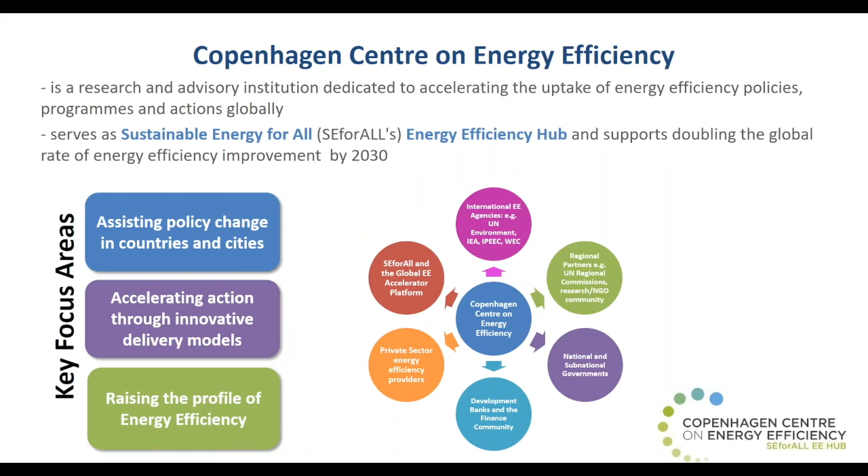Now, I would like to briefly introduce you to the speakers of today's training session. Frederick is a technical and policy lighting expert, graduating in electrical and electronic engineering with more than 35 years experience in the lighting industry. As international lighting specialist for United for Efficiency, Mr. Bass supports the development of technical tools and resources such as the Lighting Model Regulation Guidelines.

On the other hand, Bruno Lafitte is a lighting energy efficiency expert with more than 15 years of professional experience within the sector. He holds a PhD in physics and a master's degree in electrical engineering. As international lighting specialist for United for Efficiency, Mr. Lafitte provides support in the development and implementation of energy efficiency policies and labeling programs for on and off grid lighting in country and regional projects.

Our other panelist, Clara Camarasa, is a researcher and project manager with more than 5 years of experience in the field of energy efficiency in the building sector. At UNEP DTU, she is working as a postdoctoral researcher, and in the last 5 years of her career, she has focused on generating building data, along with other analytical frameworks needed to describe and accelerate the diffusion of energy efficiency technologies.

Our last panelist of today's training session is Raju. He's a senior expert on energy efficiency. And at UNEP DTU Partnership, he focuses on the analysis of policy issues, conducts qualitative and quantitative studies, providing technical advice and other direct support associated with energy efficiency in countries and cities.

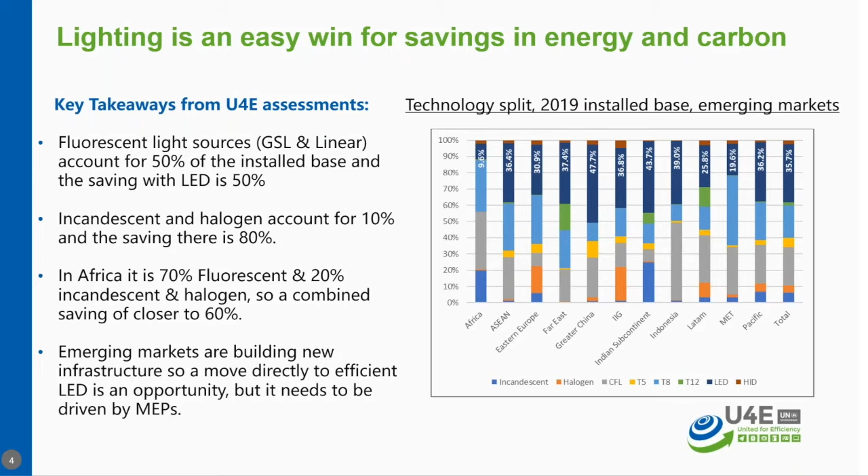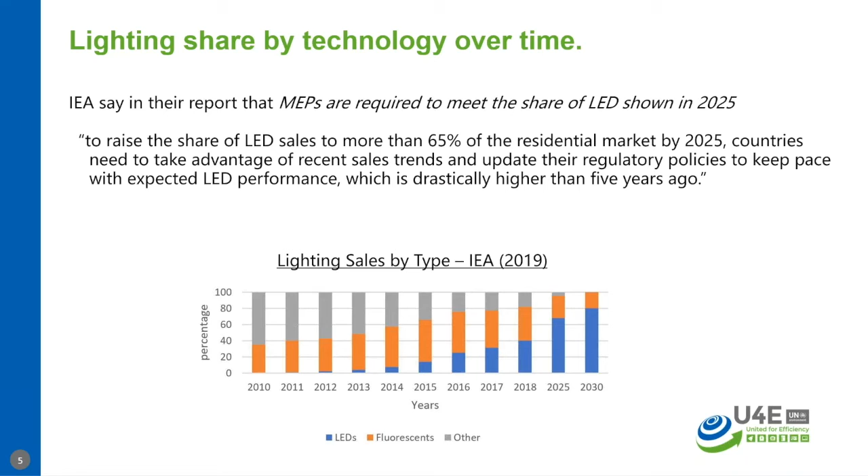Just a word about the model regulation guidelines. As I said, it's a policy framework, and we're looking across several different technologies. I'm talking about lighting today, but we're also working on refrigerators, air conditioning, motors, and transformers, all of them consuming electrical energy, all of which can be made more efficient by setting minimum energy performance standards.

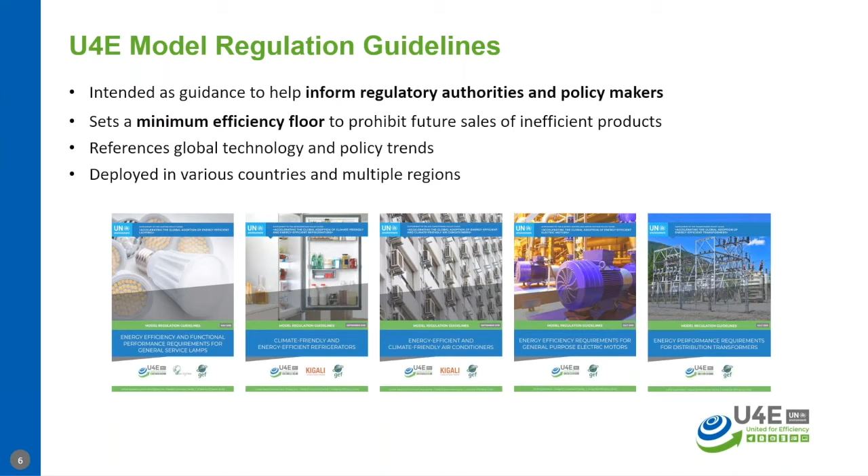When we produce model regulation guidelines, and they are intended as guidelines for national authorities to work with, we also produce supporting documentation. And for the lighting model regulations that I'm currently working on, we have in parallel written a document which will be published together with the regulations to support and explain the opportunity and how to introduce those regulations and adopt them into national authorities' rules.

Just a few words about what we're working on right now. 2 years ago, we wrote a model regulation for general service lighting. And just in 2 years, the efficiency and affordability of the LED alternative has improved much further. So we're revising them now because it's already looking out of date. We now know that LED is affordable and can replace compact fluorescent, which is 25% of the installed base. So we no longer need to offer compact fluorescent as a low energy option. I worked for a decade offering compact fluorescent as a low energy option, which it was 5 years ago, but it no longer is a low energy option.

LED is much more efficient. So there's an opportunity to simplify the whole regulation as a result. So we're revising that GSL, and it's in its final stages now.

I'm also working on linear guidelines. That means linear fluorescent lighting. We've simplified that, again, in parallel with the GSL, and significant savings can be realized if they're introduced without delay. Fluorescent is a huge proportion of the installed base of lighting, and half of that energy can be saved by

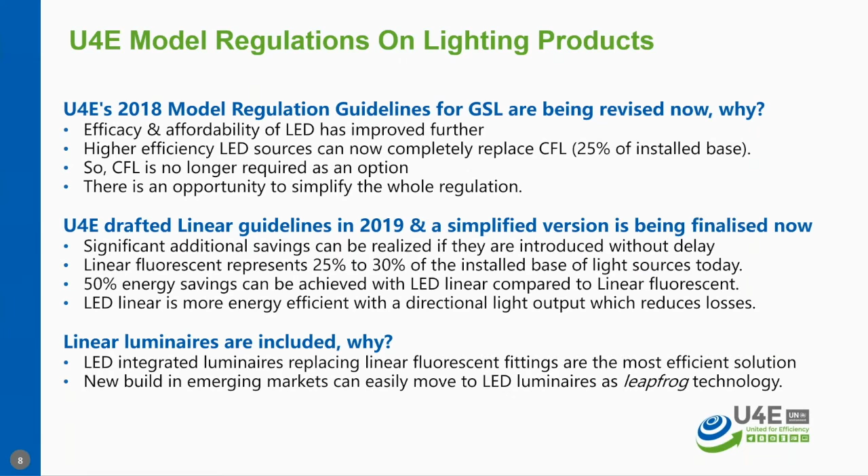Just a few points about the simplified approach. What we're working on is setting the minimum energy performance levels at the beginning of the ladder, if you like, of LED capability, which gives you maximum affordability. So the level is pitched above what conventional technology can achieve, and at the beginning of a range of efficacies that LED can achieve. This gives you maximum availability and affordability.

We're also simplifying the regulations, so it's just one level per technology. That is one lamp type, shall we say, one for linear, one for GSL, and so on. And we also have an energy rating system proposed. So although you might be on the first level of the efficacy ladder for lighting, you can be more ambitious by specifying a higher level, maybe for procurement specification or maybe for more important projects.

But in the future, you could also move up those levels through a simple modification of the regulation without having to revise it. There's basic requirements in there to make sure things are acceptable quality. The lamps last long enough. They have low flicker, so it protects the health of the end user.

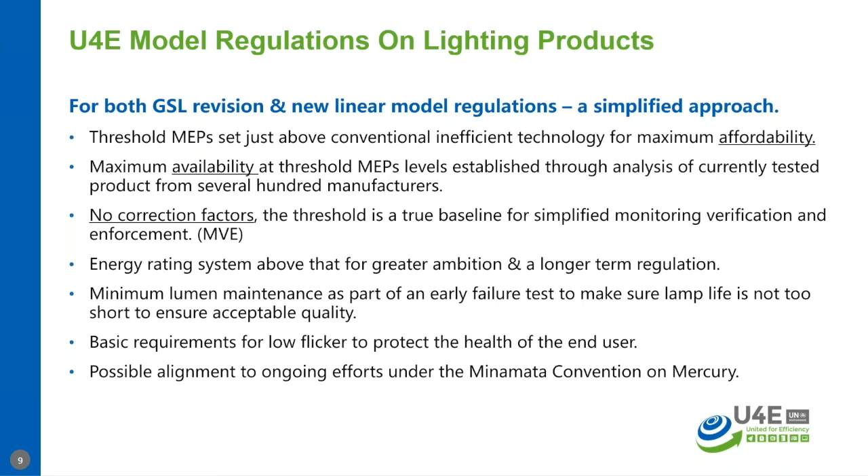And we're looking at lining up with the Minamata Convention on Mercury, to specify zero mercury. So there's a real opportunity with LED because it doesn't use hazardous substances. We can also eliminate those, and they're very difficult to control in emerging markets and quite hazardous to people's health. So an opportunity there as well.

So some conclusions. Conventional lighting is still the highest proportion of the lighting load in the electrical supply. That's everywhere, right? And the LED penetration globally is not even 40%. We have the alternative technology. It's widely available and affordable. And the only way we can drive it is to have some regulation in the market.

This will accelerate the energy savings possible across many countries. And if you don't have MEPS in place or they're poorly enforced, basically you don't get a transformation. So we've got basic quality ensured, and our simple approach that we're proposing in the model regulation lowers the barrier to mass adoption. And that's key, because if it's really going to move fast, it's got to be affordable, available, and move fast into the volume market.

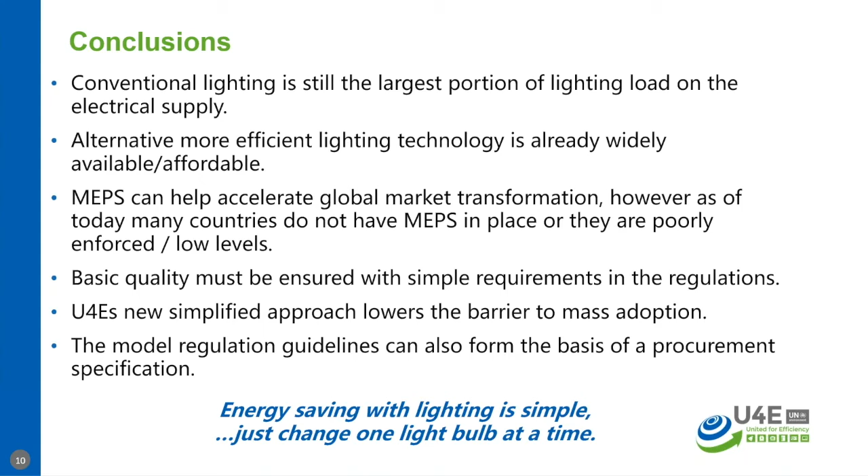And the model regulation guidelines can also form the basis of procurement specification for bigger projects. And with the structure of the energy rating system, you can be more ambitious. So as I said, energy saving in lighting is very simple. You just change one light bulb at a time, and the end user can do that.

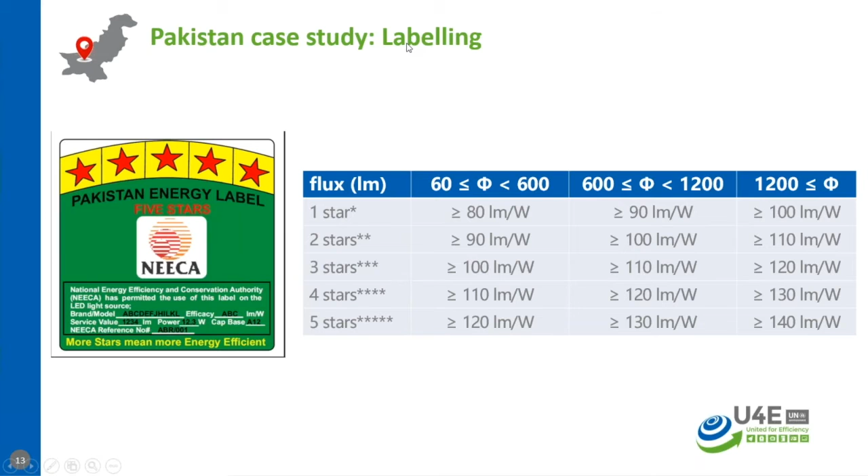Secondly, I wanted to show you the example of Ivory Coast, because in Ivory Coast, CFL and LED were in the market, are still in the market, but not widely spread, and incandescent were just banned last year. So we decided to make MEPS to transform the market and to basically get rid of incandescent lamps, because they are consuming a lot of energy, and we have solutions to replace it. But we did MEPS for CFL and LED, not only LED but also CFL,

because we want to also leapfrog to LED, and because CFL were quite efficient technology a few years ago, but now LED are the most efficient technology, and they don't have mercury inside. That's a big issue in Africa, the disposal of mercury from CFL, from all discharge lamps. And actually, it's a big issue all over the world. So we have to leapfrog to LED, but according to the market, we had to regulate CFL and LED together.

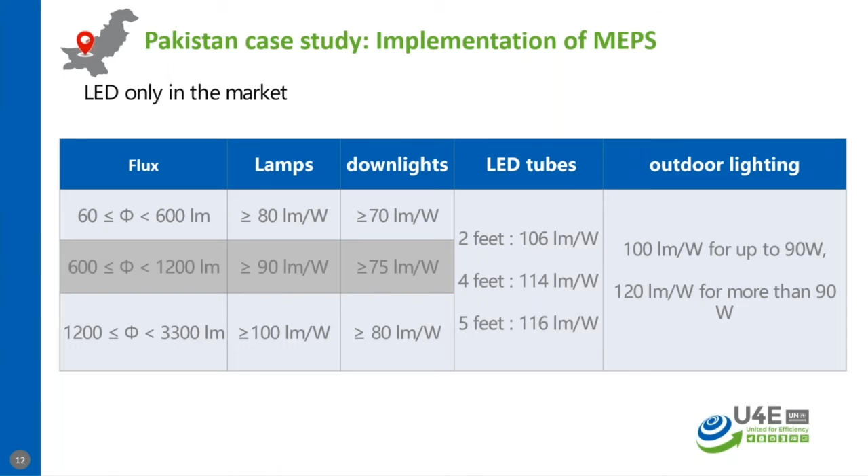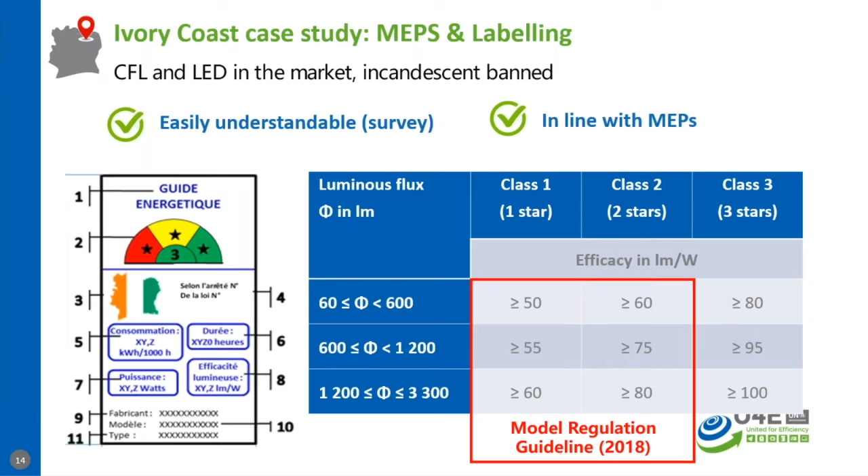Well, we can talk a lot about this, but what I want to highlight is the differences in energy performance. Here you can see for the class 3 level, which is the more efficient level, you have the MEPS at 80 lumen per watt. Whereas in Pakistan, as I showed you just before, the MEPS for the basic level from the beginning is 80. So we have to consider the market as it is. That's why all our action is beginning with a market assessment and workshops to consult stakeholders, of course.

Now I want to go to Morocco. This case study is quite interesting, because in Pakistan we had LED only. In Ivory Coast we had CFL and LED, incandescent were banned. But in Morocco we still have 3 technologies: incandescent, CFL, and LED that are in the market.

So what we want to do is to leapfrog to LED, but we couldn't leapfrog directly to LED and say, okay, now you have to buy LED only. It was not possible according to stakeholders, because manufacturers have to adapt, of course, but also because of affordability. Incandescent lamps are quite cheap.

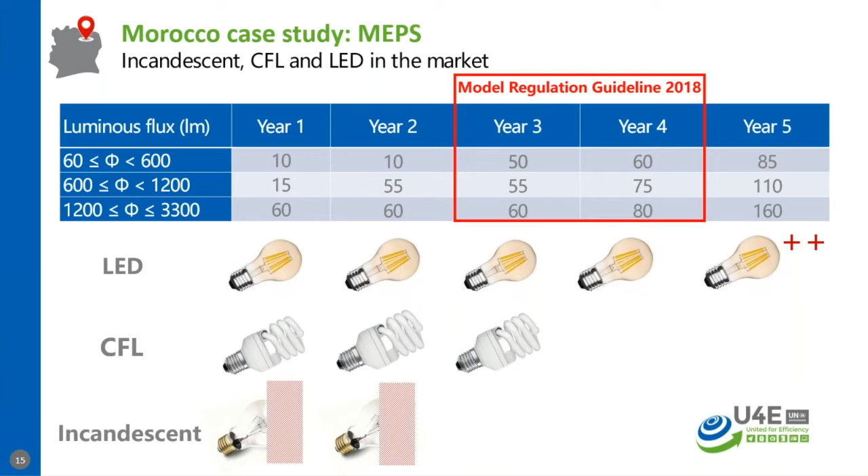In year 5, you increase once again the level to have high-end LED on the market. So within 5 years, you ban incandescent lamps, you ban CFL lamps, and you increase the level of LED so they can reach the international standards, and especially the European standards, because in Morocco they are importing a lot of lamps from Europe, and what they want is to be as close as possible to European lamps, European labeling of lamps, European information on lamps, and so on.

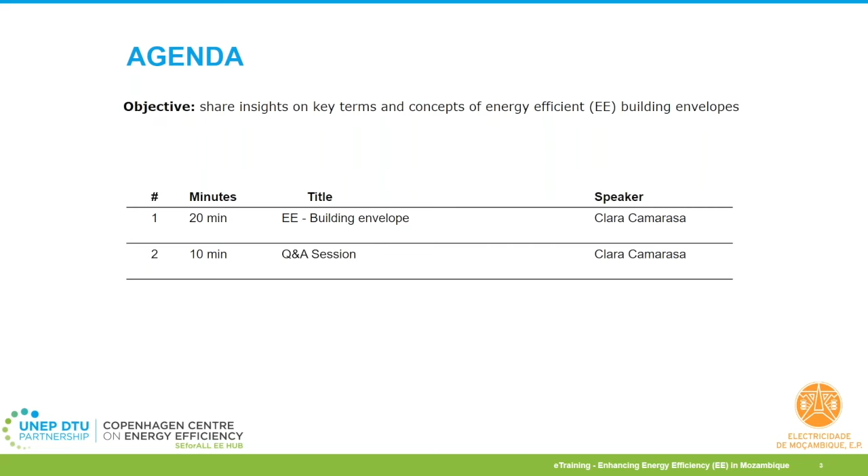Starting with the definition, the building envelope is the physical separator between the interior and the exterior of a building. Components of the envelope are typically walls, foundation floors, roofs, fenestrations, and doors. Fenestrations refer to any opening in the structure, such as windows, skylights, etc.

The building envelope serves many functions, and these can be broadly divided into three categories. First, the support, to ensure the strength and rigidity, providing structural support against internal and external loads and forces. Then control, controlling the exchange of water, air, condensation, and heat between the interior and exterior of the building. And finally, finish. This is more related to an aesthetic purpose, to make the building look attractive while still performing the control and support functions I just mentioned.

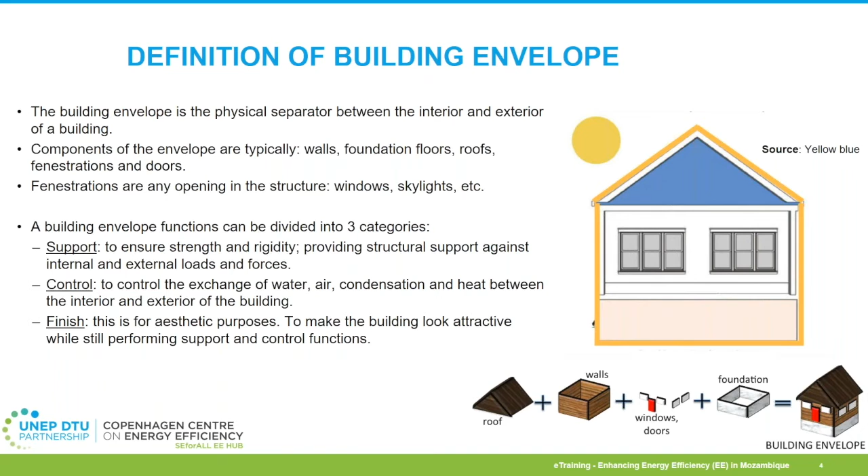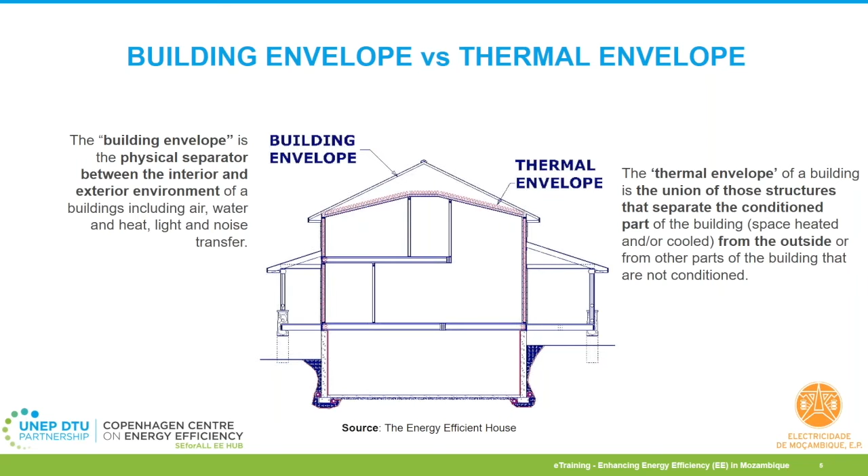But when defining the building envelope in the context of energy efficiency, it is also important to distinguish between two key terms, building envelope and thermal envelope. The building envelope is the physical separator between the interior and exterior environment of the building, including air, water, heat, light, and noise transfer. Whereas the thermal envelope of the building is the union of those structures that separate the conditioned part of the building, meaning the space being heated and or cooled, from the outside or from other parts of the building that are not conditioned.

From an energy perspective, the envelope is a composition of layers with varying thermal and permeability properties. It may be composed of membrane, sheets, blocks, and pre-assembled components. The choice of the envelope is governed by the climate, as we will see in the next slide, culture, and available materials and resources. The range of choices in the envelope design can be illustrated by two opposite design concepts: the open frame and the closed shell.

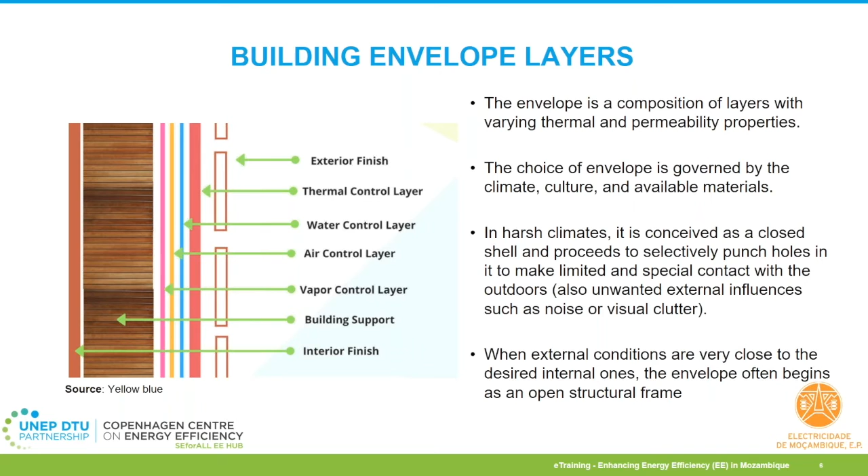In harsh climates, the building envelope is typically conceived as closed a shell as possible, and proceeds to selectively punch holes into it to make limited contact with the outdoors. This may also be true when there's any unwanted internal or external influences such as noise or visual clutter. When external conditions are very close to desired internal ones, the building envelope often begins as an open structural frame with pieces of the building skin selectively added to modify a few outdoor forces.

The next type of climate is cold climate. These have many more heating degree days than cooling degree days. Therefore, maximizing insulation is key to keep the building warm, as well as using windows for solar gain on thermal mass in the building envelope, unlike the arid climate we just saw. Part of having an effective insulation in cold climates is an airtight envelope, avoiding infiltration at all costs. Also, having small and well-selected openings.

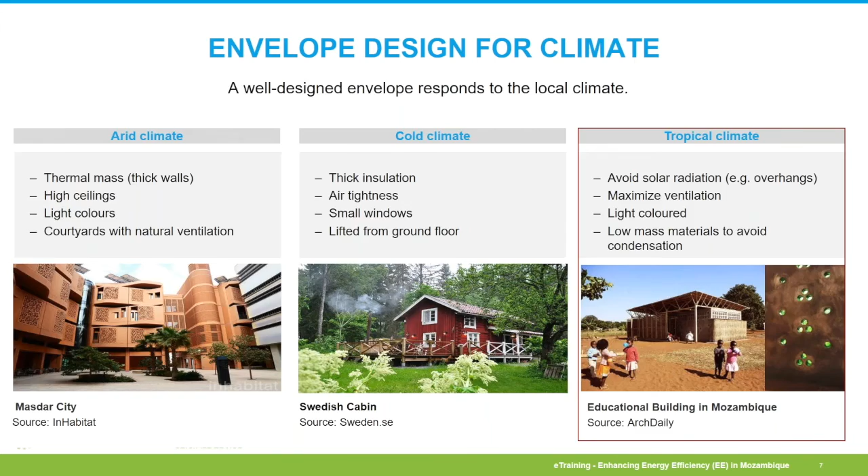Now, in this presentation, I will focus on the energy efficiency measures and characteristics for the building envelope, focusing on those most relevant for the Mozambique context. Now let's have a quick look at overarching building physics terms and concepts that are necessary to better understand the energy efficiency in the building envelope. Starting with heat transfer. Heat transfer is a process of thermal exchange between different systems.

Generally, the net heat transfer between two systems will be from the hotter system to the colder one. Heat transfer is particularly important in buildings for determining the design of the building fabric and for designing the passive and active systems necessary to deliver the required thermal conditions for the minimum consumption of energy and resources.

The mechanisms of heat transfer can be described as conduction, convection, and radiation. Convection is the transfer of heat by moving air, like warm air rising to the ceiling. Conduction is the transfer of heat through solid materials, such as heat being transferred from warmer sections of the walls and ceilings to cooler areas. And radiation is the transfer of heat in the form of electromagnetic waves, such as heat being transferred from the roof of a house to the ceiling.

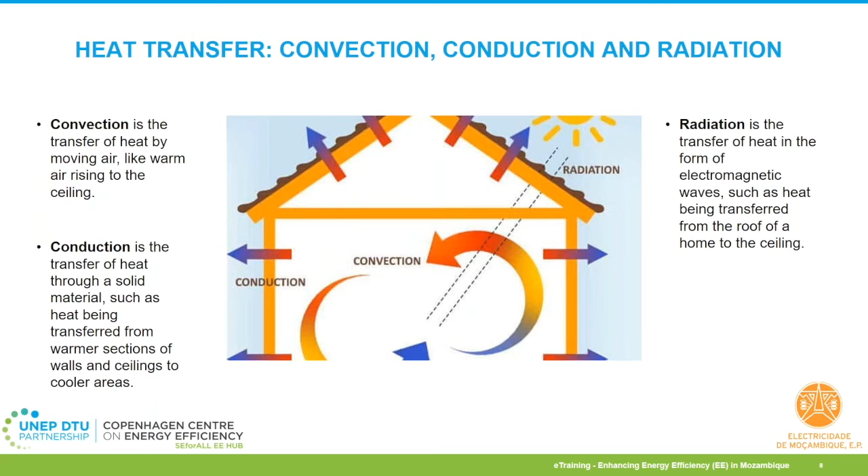Heat tends to flow from higher temperature to lower temperature zones by all three of these mechanisms. The rate of heat flow by any of these three forms is determined by the temperature difference between the two zones or areas that we're considering. Therefore, the greater the temperature difference, the faster the rate of heat flow.

Optimizing the heat transfer through walls is very important in the performance of a building design. Thermal mass and insulation with passive design strategies can reduce the amount of energy that active systems such as HVACs need to use. Resistance to conduction is measured by the R value. A high thermal resistance requires a high R value. And the insulating performance is measured by the U value. The lower the number, the better the insulation performance. In this way, the U and the R value are reciprocals.

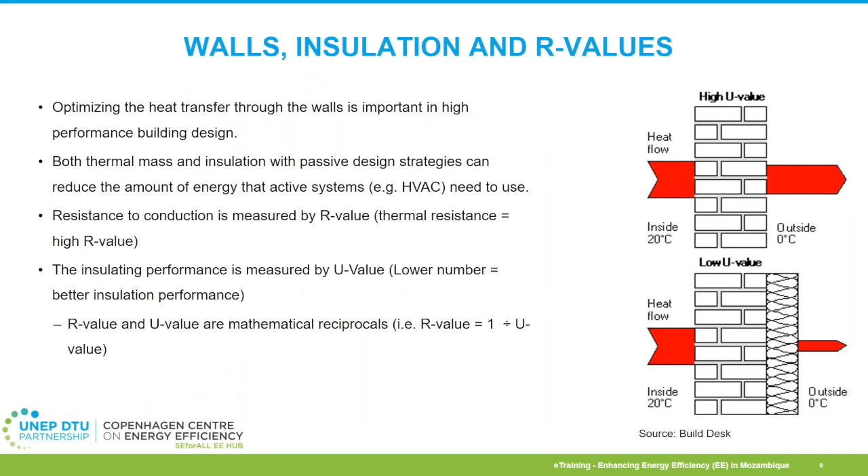If you have ever walked into a masonry church or monument during the summertime, for instance, you have likely felt the pleasant temperature difference immediately, and then realized that there's likely no air conditioning at play. This natural ability for masonry, for example, to absorb and store heat produces multiple benefits to the occupants or users of the building, including peak heating and cooling loads can be reduced since the high and low temperatures of the space are moderated and temperature variations are reduced.

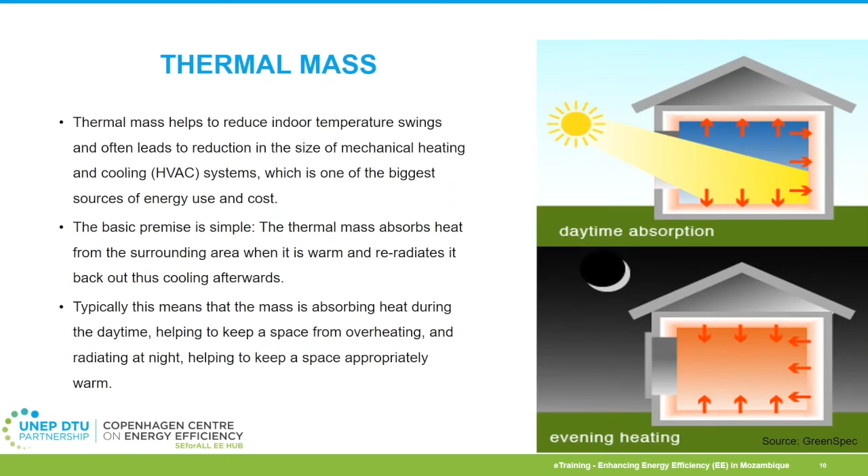Peak heating and cooling loads can also be shifted to non-peak hour savings. And also, the size of the HVAC systems can be reduced since the high and low temperature points that the systems need to perform are likely to be trimmed. Hence, less heating and cooling capacity is also needed. Use of thermal mass of materials in the building envelope is a viable energy efficiency strategy. Considerations must be taken, however, from the selection of the materials, location, orientation, ventilation, and many other factors in order to achieve an effective performance.

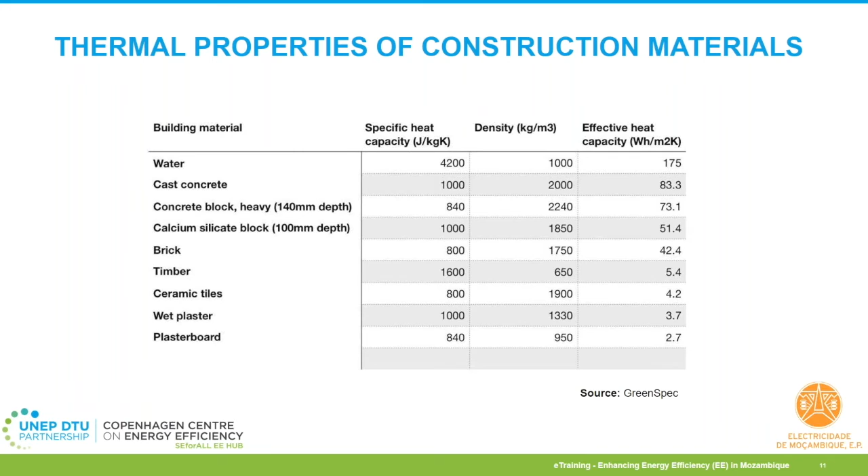To determine the thermal mass of a material, we have to know its volumetric heat capacity, which can be found by multiplying its density by its specific heat capacity. As you can see in this table, heavyweight materials such as concrete and bricks have a high volumetric heat capacity, and therefore a building constructed from these materials would have a high thermal mass. On the other hand, lightweight materials such as timber and insulated panels have a lower volumetric heat capacity and low thermal mass. Let's now have a look at insulation.

Insulation is primarily designed to prevent heat transfer from conduction and radiation through the thermal envelope. It is typically measured by R-value. Although insulation can be made from a variety of materials, it usually comes in 5 physical forms. These are batting or blankets, blown-in loose fill, foamed in place, reflective and rigid boards. In terms of batting blankets, these come in the form of batts or continuous rolls that are hand cut or trimmed to fit. They're stuffed into places between studs or joists in the building facade. Benefits of this type of insulation are that they're common and easy to install.

In terms of the blown-in or loose fill insulation, these consist of loose fibers or fiber pellets that are blown into the building cavities using special pneumatic equipment. These forms include adhesives that are sprayed into the fibers to avoid settling. The materials that are used for this type of insulation are fiberglass, rock wool, or cellulose.

And the benefits are that they can provide additional resistance to air infiltration if the insulation is sufficiently dense. In terms of reflective insulation, these are rolls of foil integrated into the building wrap or into rigid insulation boards. These kinds of radiant barriers are typically located between the roof rafters, floor joists, or wall studs. And the benefit is that they can resist radiative heat transfer. And given the resistance to heat flow depends on the heat direction, they are most effective in reducing downward heat flow. They're most effective also in hot climates rather than in cold climates.

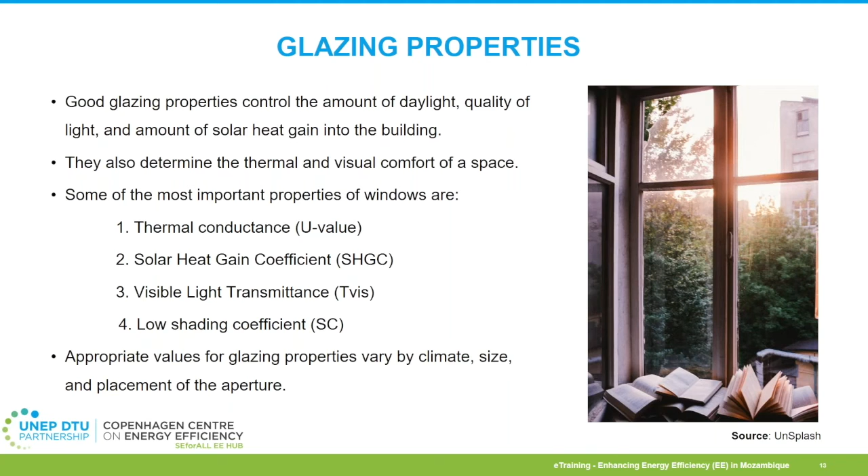But what makes an energy efficient window? Five main characteristics can be highlighted. First, the quality of the frame material, as they can reduce heat transfer and help insulate better. Also, multiple panes: two to three pane glass windows with an air or gas-filled space in the middle insulate much better than a single pane of glass. Also, low E glass. These are special coatings that reflect infrared light, keeping the heat inside in winter and outside in summer. Also, gas fills. Some energy efficient windows have argon, krypton, or other gases between the panes. These odorless, colorless, and non-toxic gases insulate better than normal air.

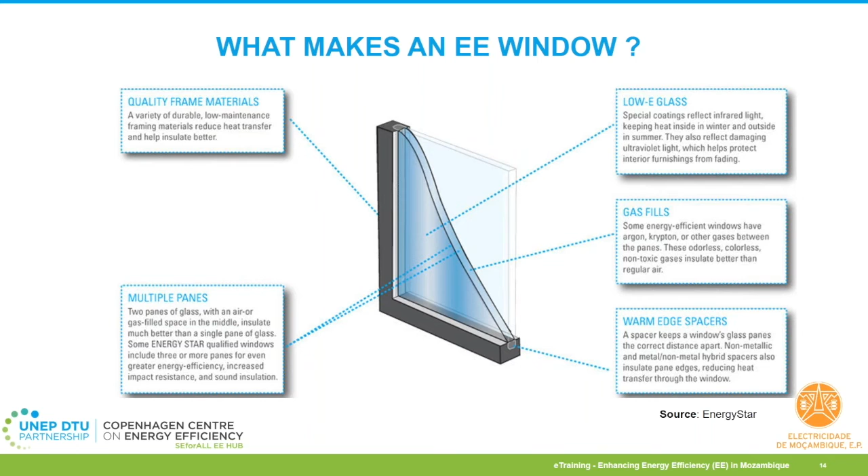And finally, warm edge spacers. A spacer keeps the window glass panes the correct distance apart. Non-metallic or hybrid spacers also insulate pane edges. I must say that an energy efficient window is usually a very low-hanging fruit in terms of energy efficiency measures that can be implemented in a building envelope, as it has a very low cost, can be easily replaced, and has a very positive impact on the energy demand and therefore the bill of the building.

Another energy efficiency measure related to the building envelope is shading and/or redirecting the sun. It entails an important set of strategies for visual and thermal comfort. Shading strategies include overhangs, louvers, and vertical fins. Light redirection strategies include light shelves and baffles. All of these strategies can be external to the building or internal, and can be fixed or adjustable. Some elements are able to give shade but also redirect light at the same time. Both thermal and visual comfort should be considered simultaneously when designing these elements, as they affect both.

Shades can keep the heat and glare of the sun from coming through the windows, while still allowing diffuse light and views to enter. They can also keep direct light off the walls and roofs to reduce cooling loads. Interior shades do not block solar heat, but can block glare and even out the light distribution, which is also important.

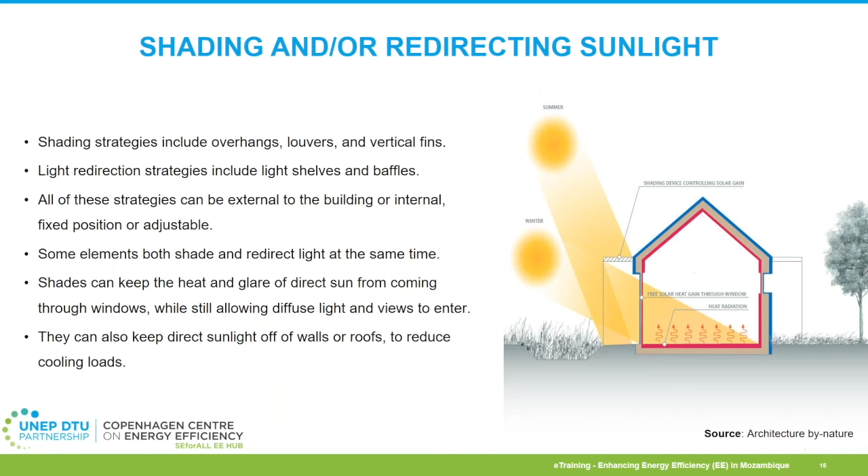Now let's have a closer look at the solar control and shading devices. These can be provided by a wide range of building components, including landscape features such as mature trees or hedgerows, like in the case of the Repsol campus in Madrid from the picture to your far left. Exterior elements such as overhangs or vertical fins. Low shading coefficient glass in line with what we mentioned earlier. And interior glare control devices such as Venetian blinds or adjustable louvers, as you can see to your right.

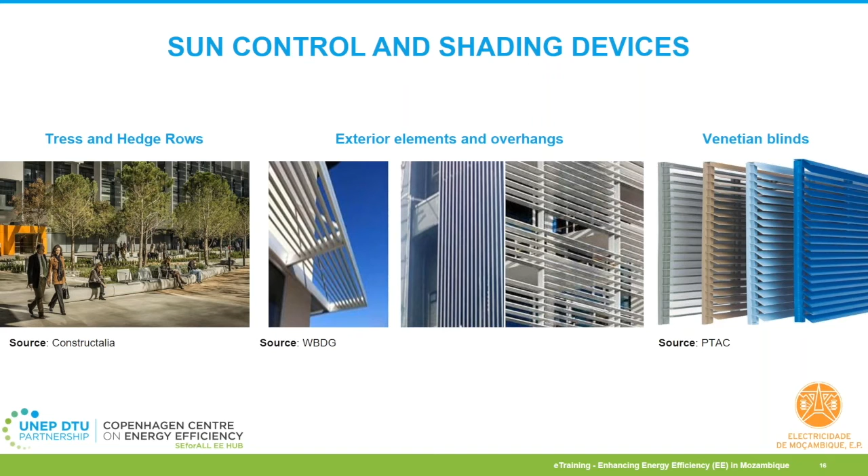But these are just some of the terms, concepts, and solutions needed to understand the fundamentals of energy efficiency in the building envelope. Yet again, as mentioned in the earlier session, the building works as a system, exactly like the human body, where all of the parts of the system need to work together to function properly.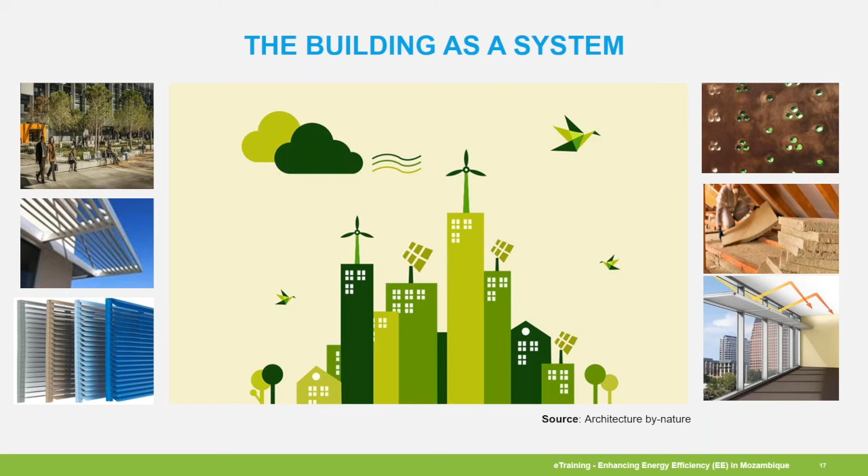Inasmuch as the thermal mass and insulation with design strategy of the building envelope can reduce substantially the amount of energy that active systems need to use, such as HVAC systems, these still need to be aligned with the other building components for an optimal energy efficiency in the building, such as HVACs, lighting, appliances, etc. Which is another good reason why I would encourage you to not miss the upcoming sessions of this training.

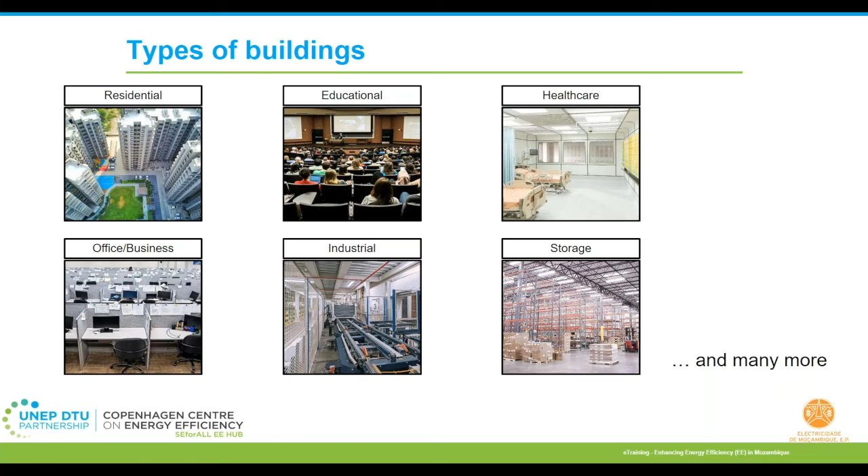So when you talk about buildings, they could be of any type and used for some specific purpose. For our presentation today, I will be mostly referring to content that is widely applicable for, let's say, educational or institutional buildings, businesses or industrial type of buildings, or storage and commercial type of buildings. To a certain extent, this can also be applicable for the residential type. We will see how energy audits are conducted and how energy management is adopted in buildings now.

So yes, regarding energy management, we will revisit this information exclusively with respect to buildings. We have discussed earlier the 4 different factors that are necessary for successful energy management. So yes, technical ability. Does the organization have the technical ability to understand the energy terminologies? From a buildings perspective, do you have knowledge of the different passive and active systems in place, how they operate, and how you maintain them?

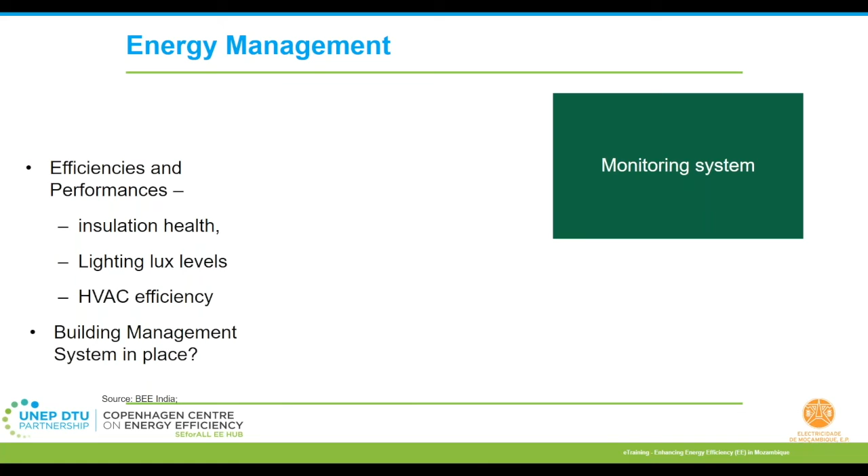Regarding the monitoring systems in the building, it could be about following the energy consumption trends, checking your insulation health or lighting lux levels, and how your HVAC systems are functioning. You can also monitor your occupancy levels to come up with various ways to optimize your energy consumption accordingly. And of course, how effectively you are utilizing your building management systems. Do you even have a building management system in place, if applicable?

Strategy plan for buildings is more or less a similar approach to what we've discussed in module 1.4. Of course, the nitty-gritties with respect to the departments covered and the components that have to be dealt with will have to be customized for the building sector. And of course, management support is required; it is inevitable to initiate anything.

So the energy management principles remain the same. They may not be as extensive as compared to a complex industry, mostly because the number of divisions, the departments, the roles and responsibilities, and the components are slightly less complex with respect to buildings. The number of personnel involved is also generally fewer. Often it so happens that there is a facility manager and a small team of technicians or engineers who generally take care of everything with the support of the administrative staff.

So we will quickly go through the steps again, and I will keep referring to buildings exclusively wherever necessary. Number 1, the management support. Well, they have to assign a building energy manager; one has to be appointed. The building energy manager can be hired, or it can be someone internal. It could be the facility manager or the electrical or mechanical technician who is in charge of day-to-day operations.

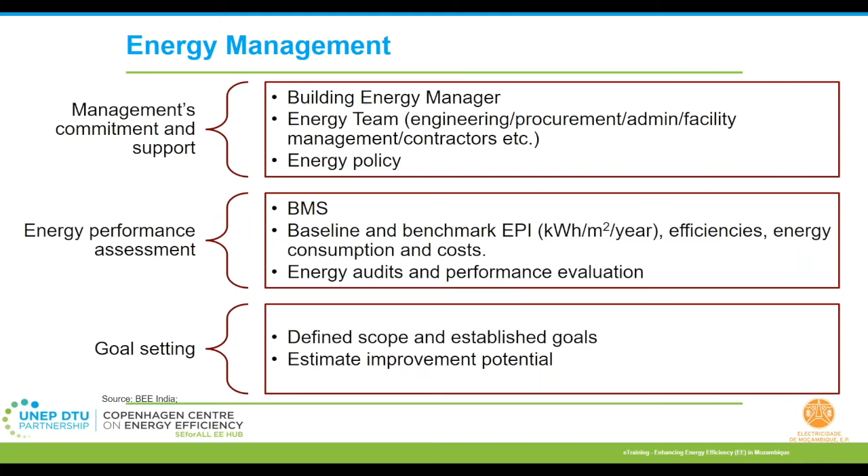Number 3, goal setting. Once you actually set your EPIs and metrics, baselines and benchmarks, you would be defining the scope and the goals. So you know where you are, you decide where you want to reach, and the difference is your estimated improvement potential. Through energy audits and technical assessments, you will know how you can achieve those goals. Based on these recommendations, roles and responsibilities will have to be assigned to your staff and other building personnel.

Implementing the action plan. Let's say I have installed a variable frequency drive for a pump with pressure feedback, so that the pump operation and the power consumption is taken care of automatically based on the user side water demand. And then, of course, someday someone comes who is not aware of the setup and starts opening and closing the discharge valves of the pump's pipeline. Then it would defeat the very purpose of installation of a VFD, a variable frequency drive.

So yes, to an extent, I would say communication, creating awareness, and training is important. I have seen in many buildings, the canteens and other common spaces, where they set up these big boards and slogans or posters with lists of actions on energy efficiency drives. You could also have competitions on best innovative energy conservation ideas. This way, the staff also gets motivated and feels included in the building energy efficiency drives.

Number 6, progress evaluation. Yes, you have set your baselines. You should again measure these parameters under similar conditions to see where you stand now. And I also talked about this baseline and boundary setting in the module 1.1 and 1.3 presentations. So you compare your values, past and present, and then see if you have reached your benchmark figures, or if not, how far you are from that.

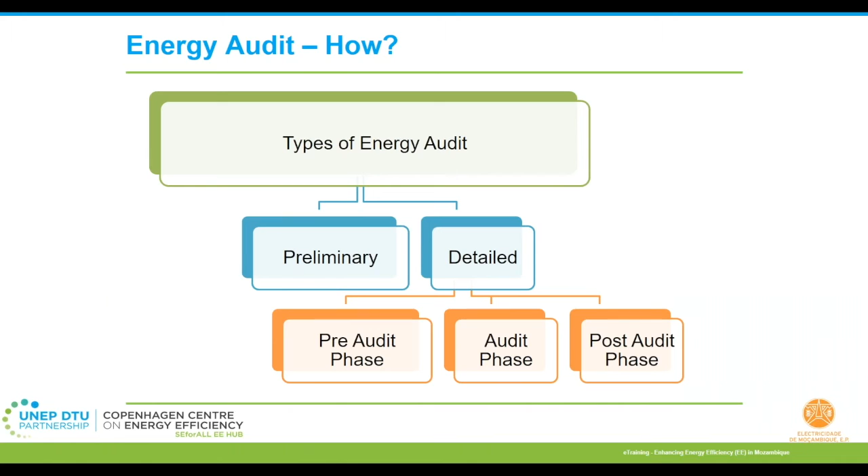You should be a good judge by now, understanding if your action plans really worked, or you may have to review them. So yes, the energy audit types will be the same, preliminary and detailed energy audit. The principles of preliminary energy audit would be more or less following the same pattern. For details, please do refer to module 1.4. Today, we will be taking an example of how it is applicable, an example exclusively for buildings.

Let's take an example of an energy efficiency drive in municipal buildings. So a municipality plans to improve energy efficiency in the building sector. The municipality has a list of different types of buildings and their usage purposes under their jurisdiction. So to start, it would not be ideal to say that the municipality should target all the buildings in the first phase. Imagine there are some hundreds of buildings; all of them need not be targeted right away. All possible rules and laws of the municipality with reference to energy efficiency may not be applicable to all these buildings in the same way in a practical sense.

So the recommended approach would be to first understand the energy metrics of all these buildings and the possible potential of energy reduction, right? This is when the preliminary energy audit approach is very helpful. The municipality can hire some energy audit consultants, experts or firms and distribute these hundreds of buildings among them, and then ask them to do a quick preliminary energy audit. The distribution may be with respect to the locality or type of buildings.

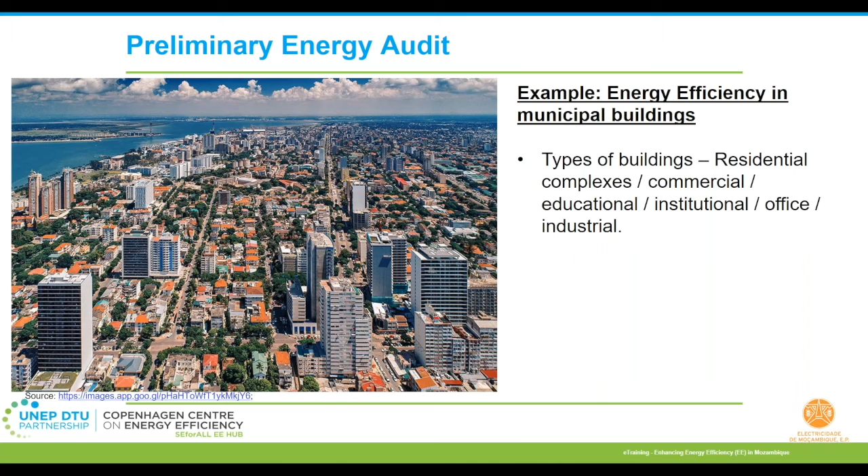So we discussed these steps earlier. The first one is establishment of energy consumption. Let's say these energy audit teams which the municipality hires would visit each of the buildings assigned to them and quickly collect the energy data. Not much depth, but basic data like annual energy consumption, that is kWh of electricity or cubic meters of gas, or the area of the building establishment.

They would define what the EPIs are, what the other energy metrics are, and identify major energy consuming areas. Usually these would be the HVAC systems, the lighting, and if possible the compressed air systems if it is an industrial building setup or a multi-specialty hospital setup. Number two, scope for energy savings is estimated. So based on the type of energy used, the equipment, the age, the technology, the energy auditing team would be estimating the potential scope for energy savings.

For buildings, you can identify the scope for potential areas based on the existing lighting fittings, the motor and pump efficiencies, or the application requirements such as space heating, hot water generation, and cooling capacities. For example, if I don't have proper insulation for my pipelines, or there seems to be significant heat gain through windows, maybe due to the orientation of the building, the type of glazing, the window types, or the walls, then the auditor would be able to suggest that there is a scope here.

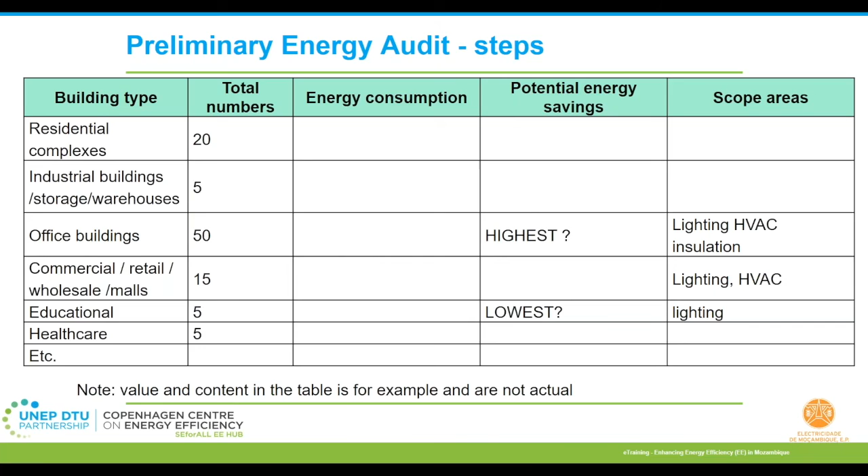As we discussed earlier, detailed energy audits are actually very detailed. So I will try to give the best and maximum information in the time that is available to us. For any further details, please do write to me for further discussions. I will follow the same 10-step approach which we covered in module 1.4, but of course, with more emphasis on buildings.

Instruments are generally standard, based on the parameters you intend to measure. For buildings, you will need ultrasonic flow meters to measure the chilled water or cooling water flow rates, and power analyzers to monitor the power parameters of different components or appliances. The thermograph is quite important. It plays a prominent role in identifying heat gain or loss via windows, leakages through doors, or identifying damaged insulation or air ducts that you cannot make out with the naked eye, and so on.

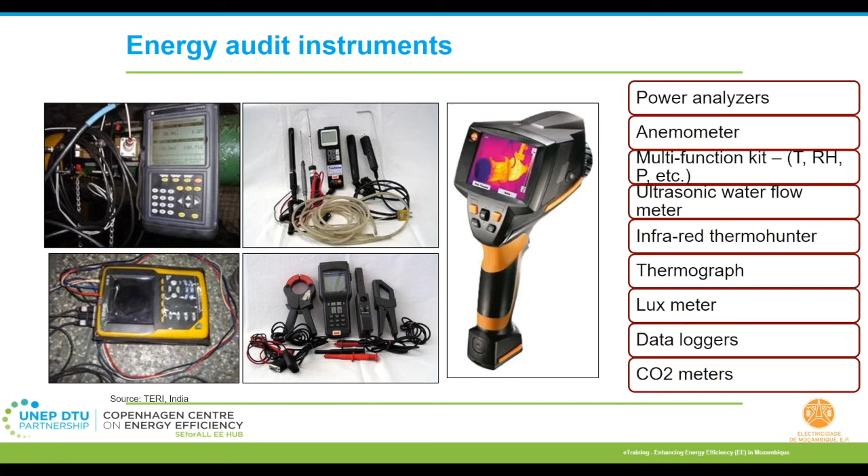Phase one is actually a pre-audit phase. I will again stress here that how effectively the auditor carries out this stage actually defines the success or the smoothness of the rest of the energy audit. So quickly, the auditor would be planning and organizing, would carry out a walkthrough audit, and then have quite a few interactions with the building personnel or the management.

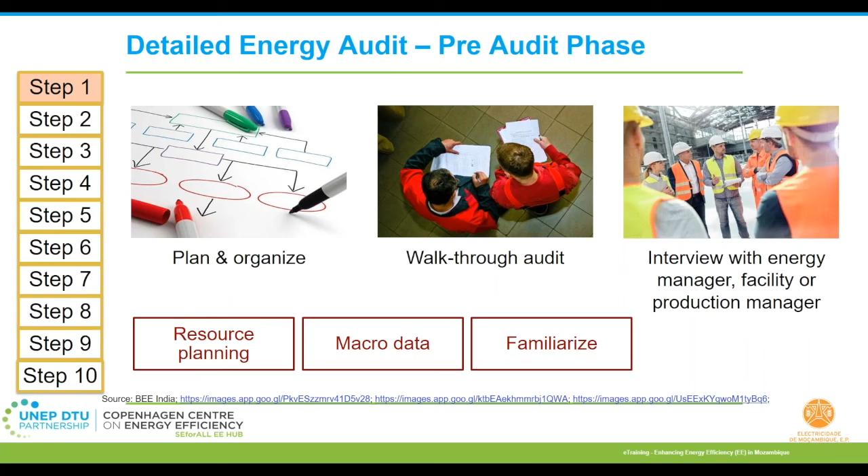This phase is important because it helps you in planning resources such as team, time, and instruments. The energy auditor or the team can possibly share a questionnaire to collect the important and useful information first during this phase. I'm sharing some formats here, examples of questionnaires and the type of data that can be collected. For example, building details like the name, its address, the point of contact person and their designation, so that future interactions and coordination are simple.

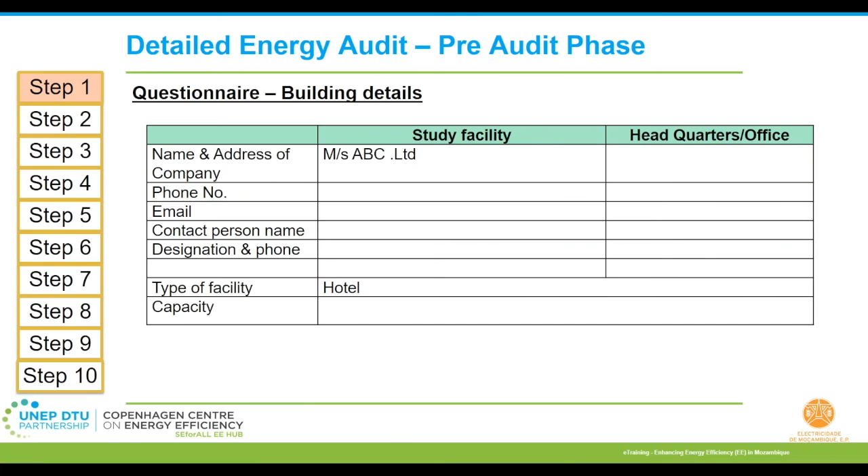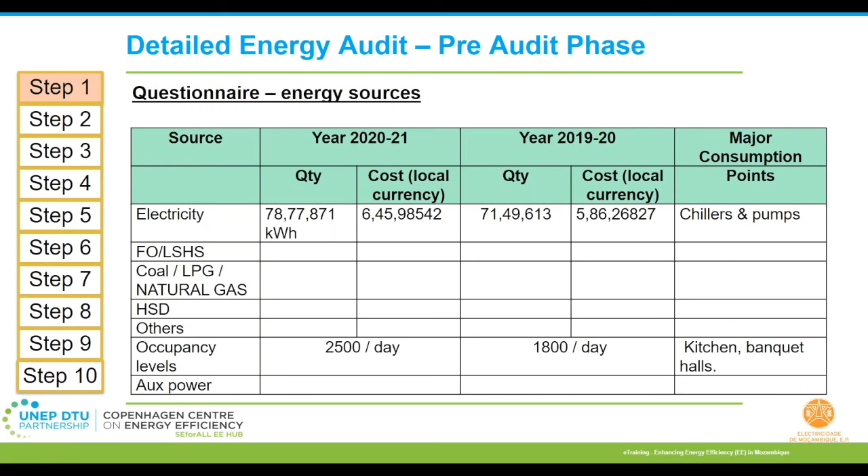And then there is an overview of energy sources to have an idea of the types of energy used, the quantum and cost of energy used, and also some major energy consumption points. This is all in the first phase. More technical data on energy parameters or power parameters.

Some technical data on, let's say, for example, transformers or electrical systems are collected or requested via the questionnaire. Like, for example, you see here, if I'm talking about transformers, what are the number of transformers, what is the type, capacities, where it is located. So all these data will be very helpful for the auditor and the auditing team during the actual course of study.

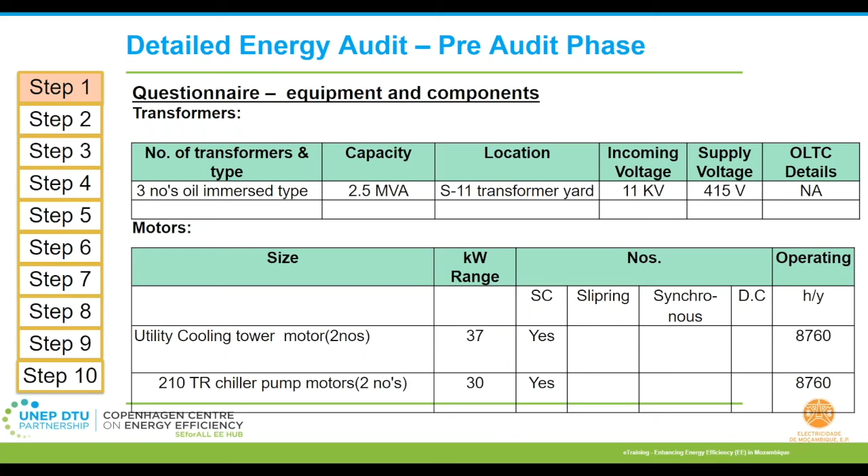Similarly here for the motors, if you see there, how many motors are there, what are the different types of motors installed, the capacities and operating hours. Similarly, some technical data for HVAC systems are collected. So yes, the auditor would be collecting basic data on numbers, types, usage, capacities, etc. for all these equipments and components like fans and blowers, lighting equipments, building envelope components through the questionnaire.

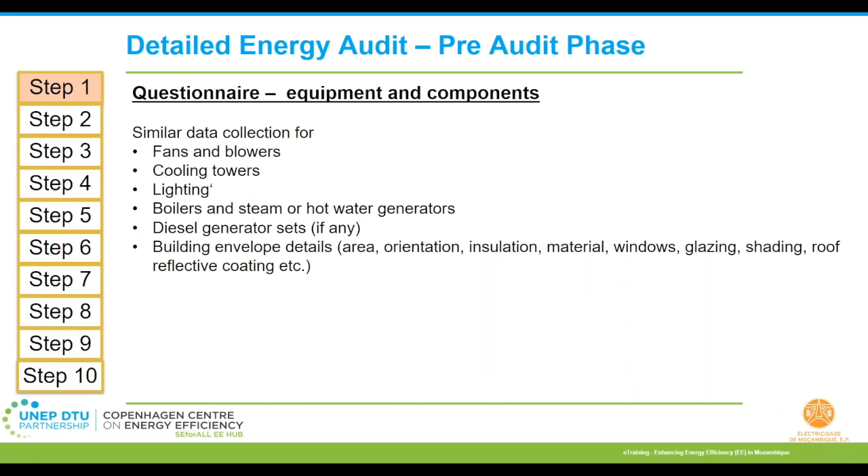So based on the data that is collected by the energy auditor, they will have an idea on the size of the building, the complexity or the time it would take to complete the audit. So they would plan their resources, such as the instruments, for example, I've shown here. So based on the data that they have collected, they would decide that these are the instruments that have to be carried to the building for the energy audit purpose, and numbers.

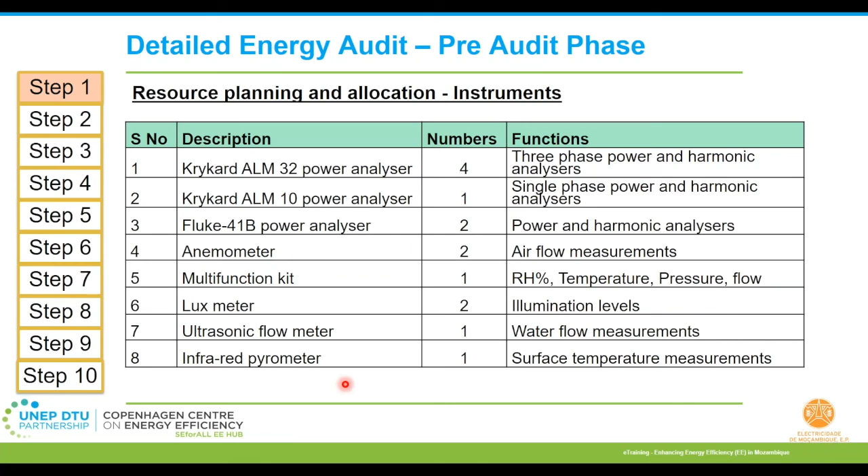And then, of course, a plan for the professionals or the energy auditors required for the team. Let's say, based on the data that I have, I would be needing some 3 people who will be taking care of the electrical and automation segment. Then probably another 2 people who will be taking care of the mechanical side. If it is an industrial process or a food process building, something like that, then a chemical engineer might also be required. So it depends. The team can also consist of an architect or a building expert, apart from all these experts.

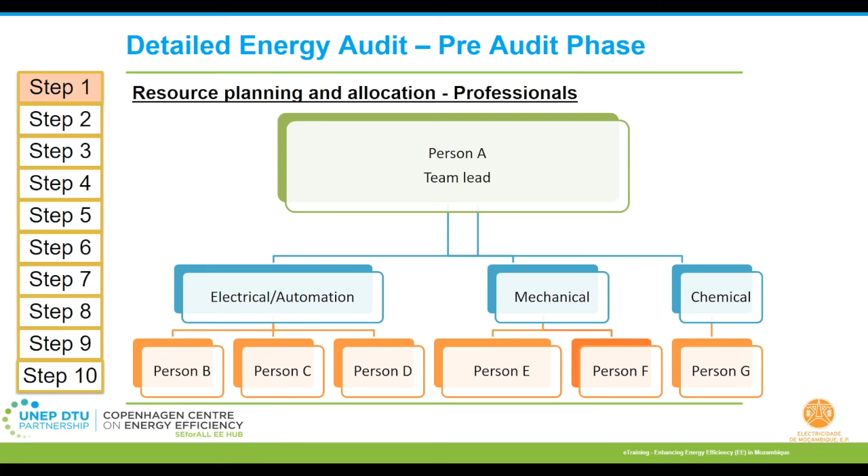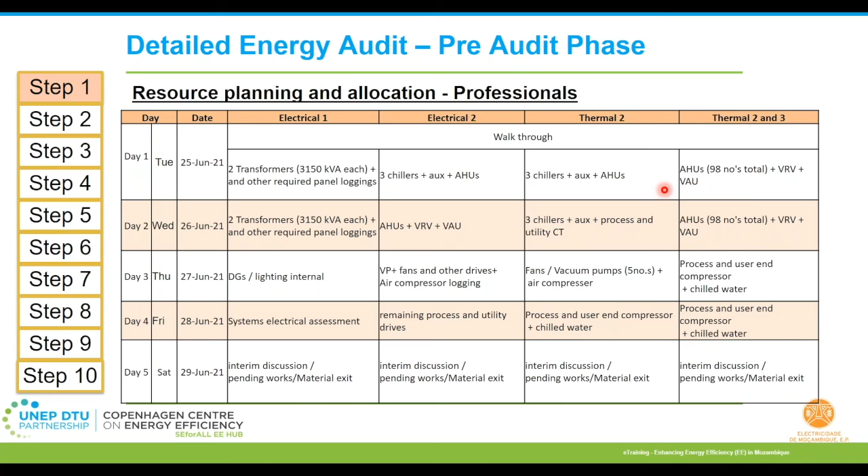Of course, the energy auditing team will be sharing the plans and timelines so that the management will ensure that they allocate their staff for the support that is required on a set date. So on this date, I would be allocating these personnel, who will be carrying out the various auditing works in these sections. So that way, the management or the coordinating members also will be able to allocate certain personnel from their end to support the activities. A tentative work plan also, basically to share and understand what are the different areas, what are the different deliverables that will be done, and by tentative dates.

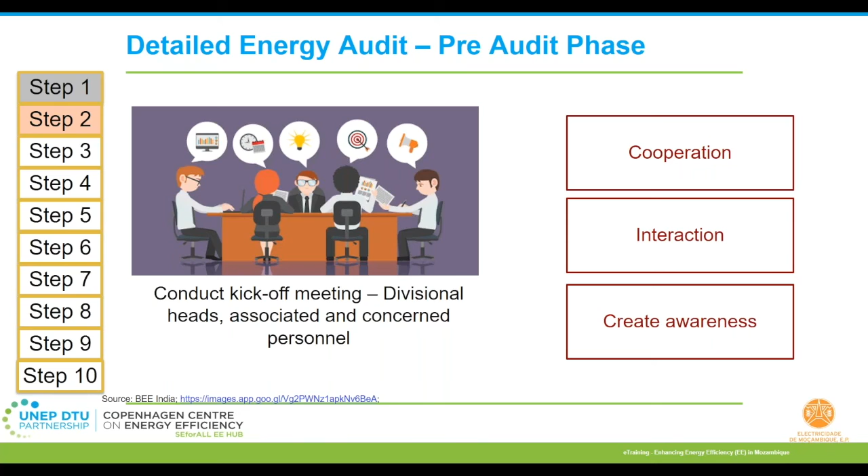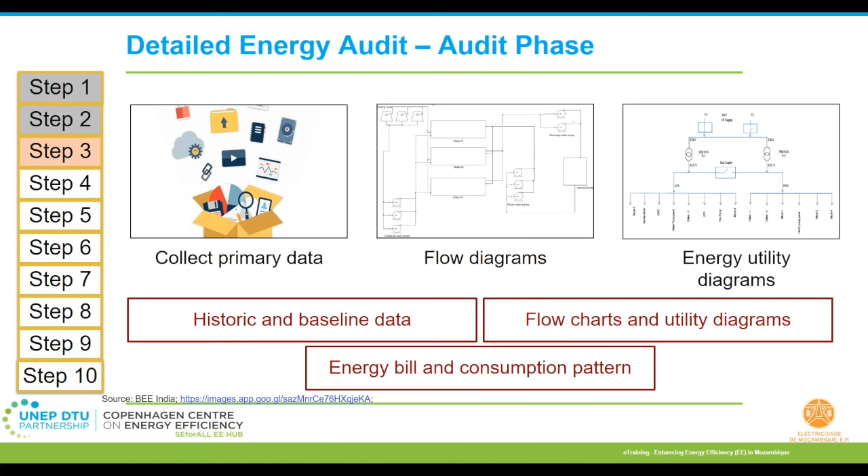Step 2, it's the same again. The energy auditing team would conduct a kick-off meeting with the divisional heads or the building management. We did discuss earlier why this part is very important. Step 3, you move into the actual audit phase, where the energy auditing team has collected the primary data, historic analysis and all. So the design and operating parameters, operating schedules, all these things will have been collected. This can also be something like collection of flow diagrams or utility diagrams or energy bills, which all fall under the primary data. For buildings exclusively, you may have to focus on these above mentioned categories, especially if the energy auditing team intends to also conduct some simulations or heating and cooling load estimations.

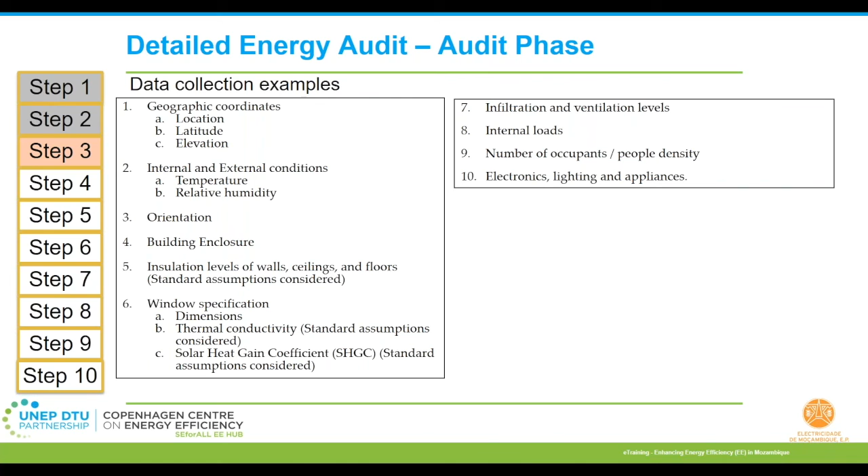So step 4, an in-depth survey and monitoring will be done for individual areas in the building. So the energy auditor would be comparing the first-hand operating data or the design data with the ones that were shared by the building through the questionnaire responses. Why comparison? Because often the responses received via the questionnaire do provide a direction for the auditing team, but most of the time they do contain some information that is quite outdated or not quite updated.

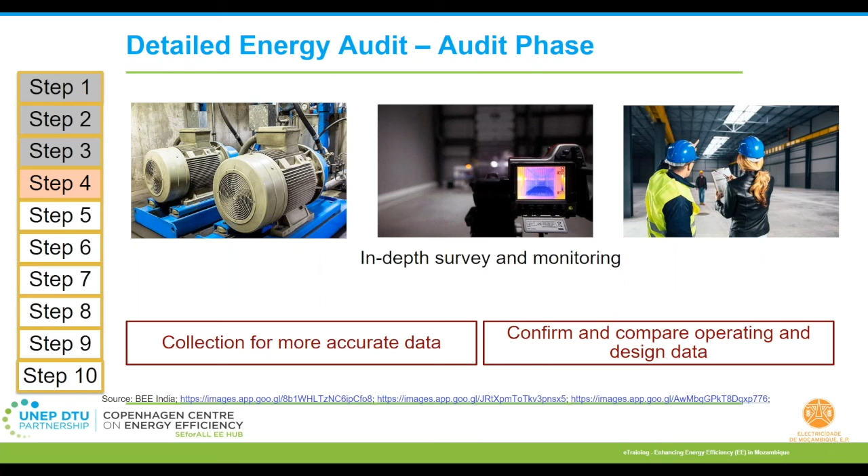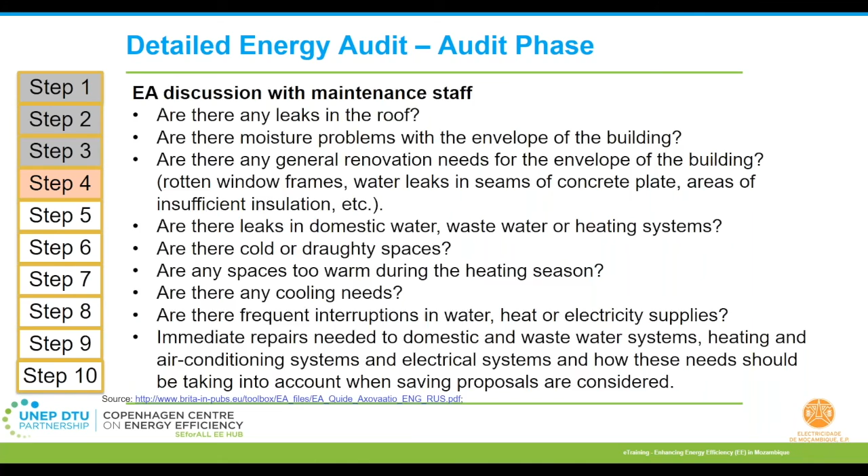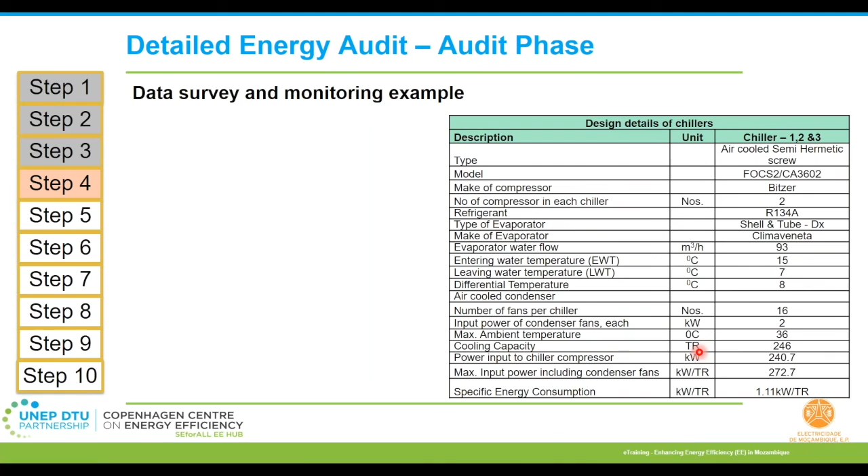So yes, the energy auditing team will start conducting detailed experiments or trials on energy intensive areas. It could be different, like say the maximum demand parameters, or power factors, or the kWh units, etc. Basically, at this step, detailed performance evaluation and efficiency trials are done through various sets of measurements.

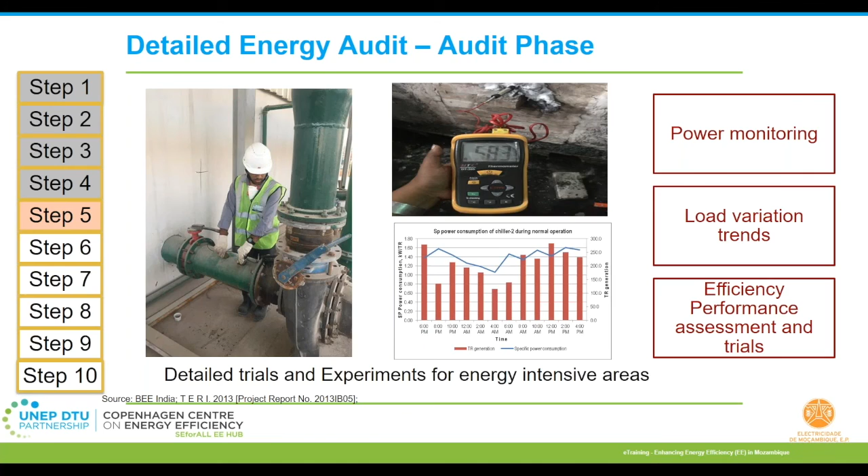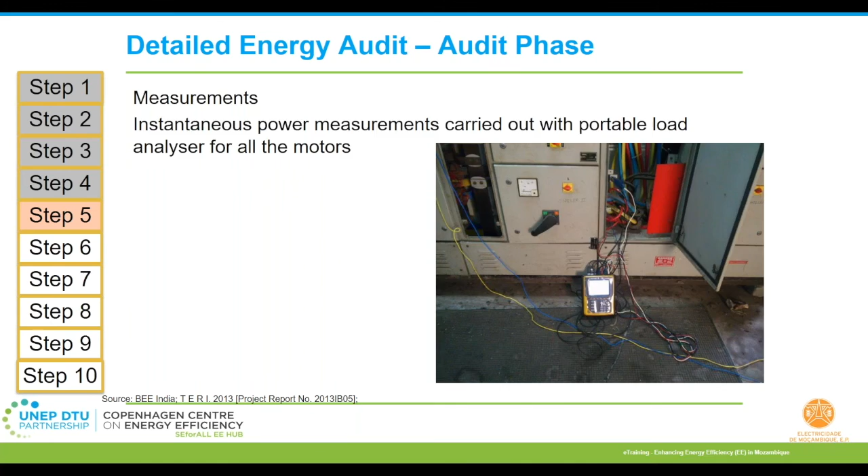This I have already shown, using a power analyzer connected to the panels to capture different power parameters, and also the chilled water flow measurements using ultrasonic flow meters.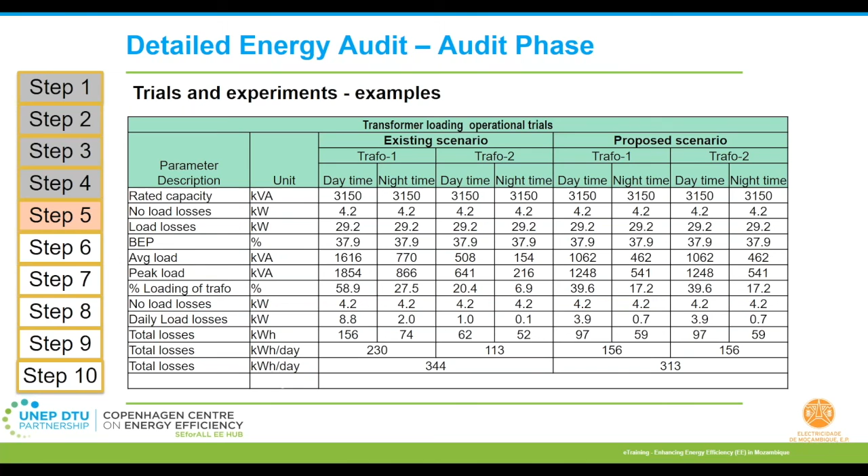Please note that I am only talking about these steps and giving examples here. The applicability of this measure may or may not be valid for your individual buildings. Trials and measurement samples showcasing loads, trend studies, and detailed measurements of harmonics of the electrical systems for the buildings here.

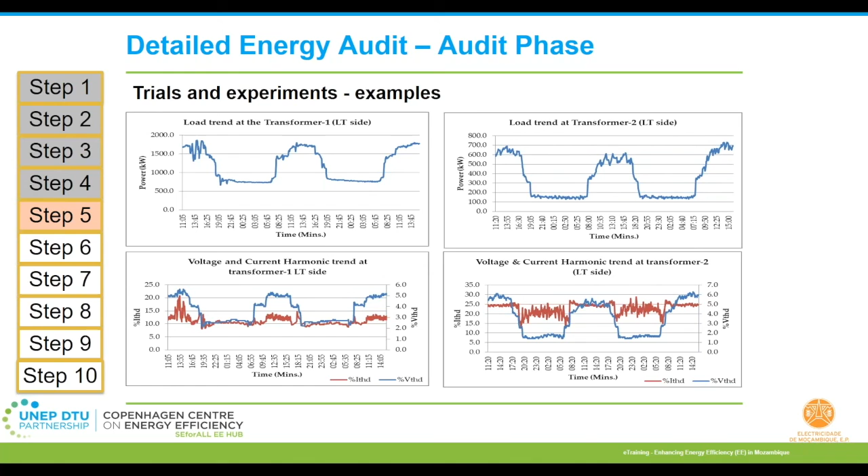I understand this is getting a bit more technical, but the end point is you need to understand that these presentations are just for example purposes, so that you have an understanding of what goes on in energy auditing practices, especially in this particular step.

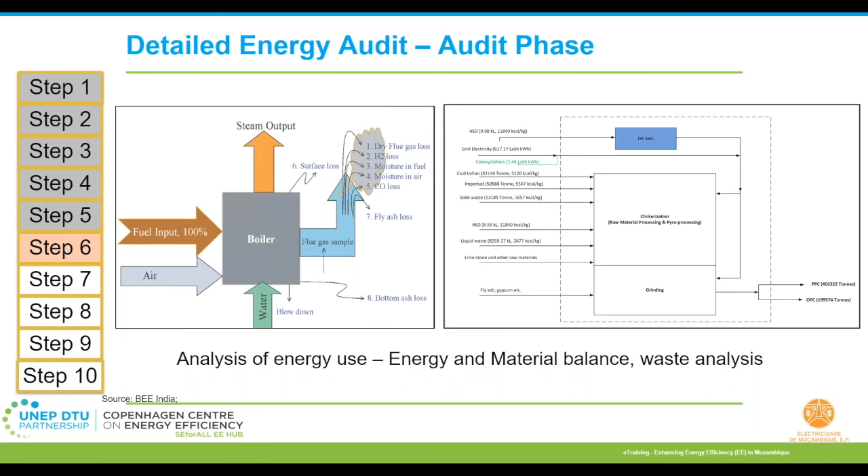Step 6 is conducting detailed analysis. Once the measurements are done, you start analyzing how you use your energy. Material balances and energy balances are done to understand the different inputs and outputs. For example, here you see for a building how the electrical consumption of HVAC or lighting varies over the week, based on the data we collect from the power analyzers. It gives you an idea what loads are operating on weekends and weekdays.

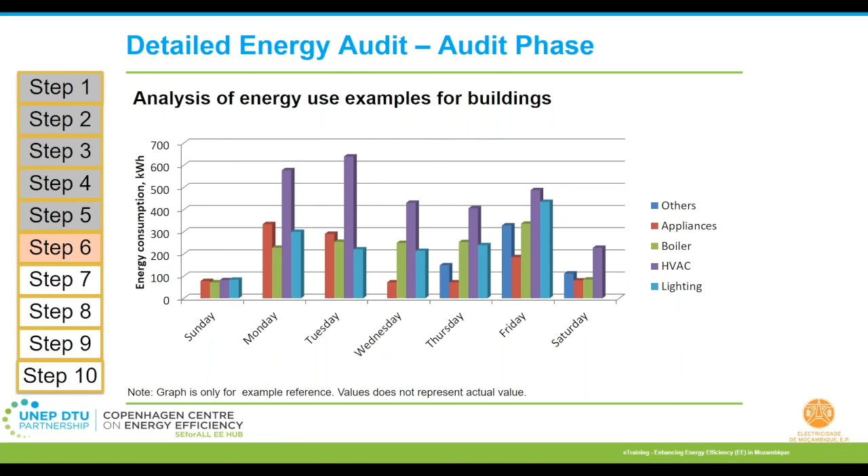This kind of data analysis can enable you to investigate further. For example, on Saturdays the HVAC load is showing a significant value. So I would be interested to know what is causing that HVAC load rise on Saturdays, because let's say my office building is closed on Saturdays and Sundays. So I would investigate further what is actually happening on Saturdays. Similar example for load distribution and balancing for energy and power measurements here.

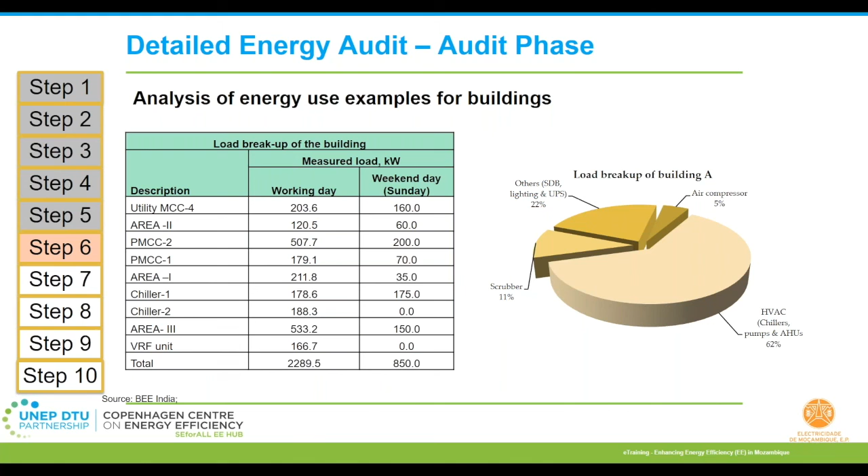Detailed analysis can also include energy balances. The figure on the left shows an example of heat balance in a building. The heat input can be due to the sun's radiation, that is, heat gain due to sun, and internal loads due to people or electrical appliances or equipment. Heat loss, on the other hand, can be due to ventilation or leakages through the envelope. It can also be heat gain if you're referring to a hot place.

The right picture gives you an example of a Sankey diagram, accounting for heat and electricity energy inputs, the components or equipment that convert this energy into the desired form of energy, and then the remainder is shown as various forms of losses.

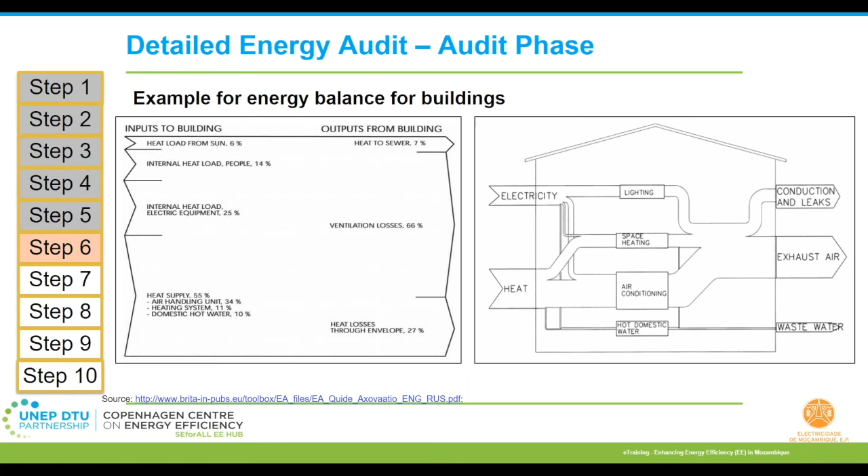So the energy auditing team will be developing the proposals, then interacting and conducting some brainstorming sessions with the building personnel to finalize these proposals. And then, depending on under whose scope this is, the building management or the energy auditing team will contact the vendors, the suppliers, or technology providers to see if the necessary recommendations can actually be implemented. That is, for the implementation, whether the required technology or equipment is actually available, or the material resources are available, and if available, at what cost.

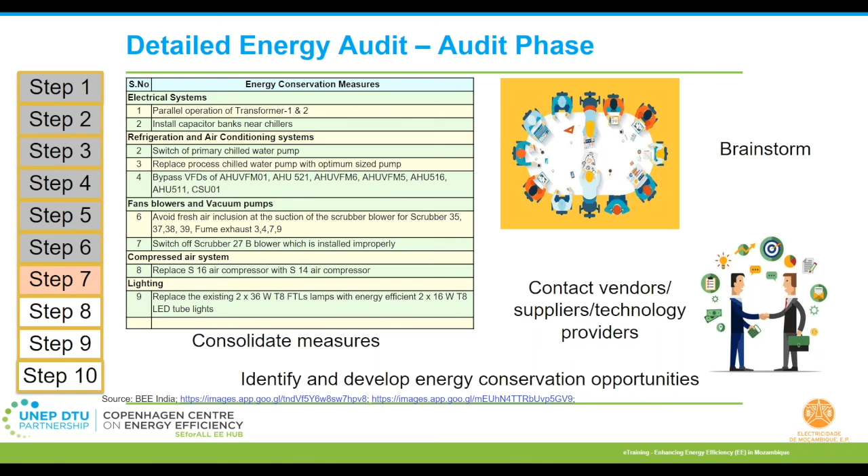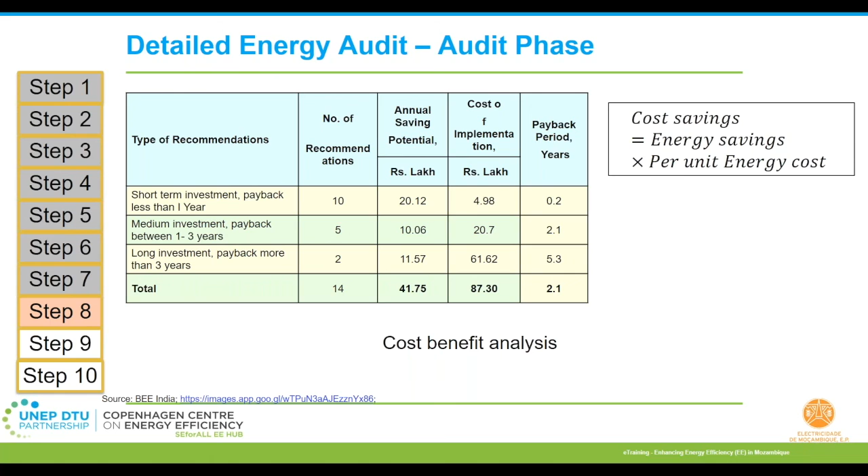Further, the cost benefit analysis is done. So you have estimated your energy savings. You multiply these by the cost per energy unit and find out what the energy cost savings are. Then you also evaluate the payback periods, and you prioritize your implementation strategies accordingly. I'll show you an example here again, basically how you consolidate your energy conservation measures and cost saving potentials, the investment cost for the said energy conservation measure, and the payback periods.

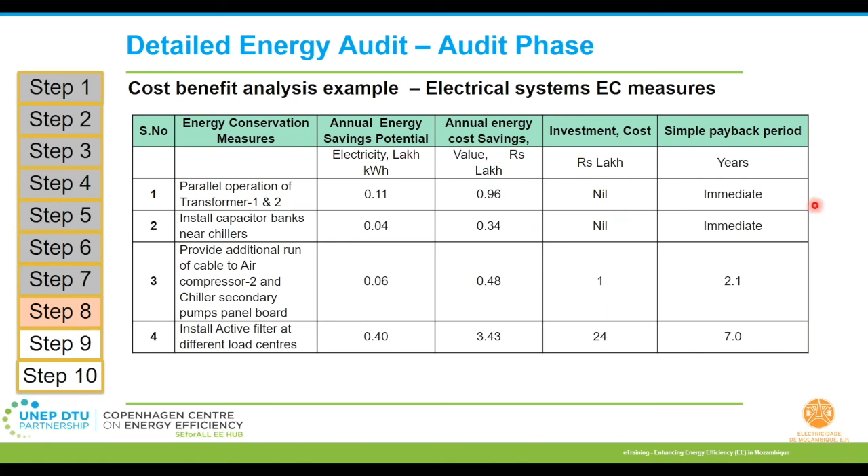So here I'm giving an example for different energy conservation measures that were identified for electrical systems. For each measure, you have the actual energy saving, the equivalent cost saving, the investment that is required for carrying out this measure, and the payback period. Similarly, I am showing here the example of energy conservation measures for, let's say, HVAC systems. So you have different measures for HVAC systems, the different saving potentials, the investments that will be required, and the simple payback periods calculated.

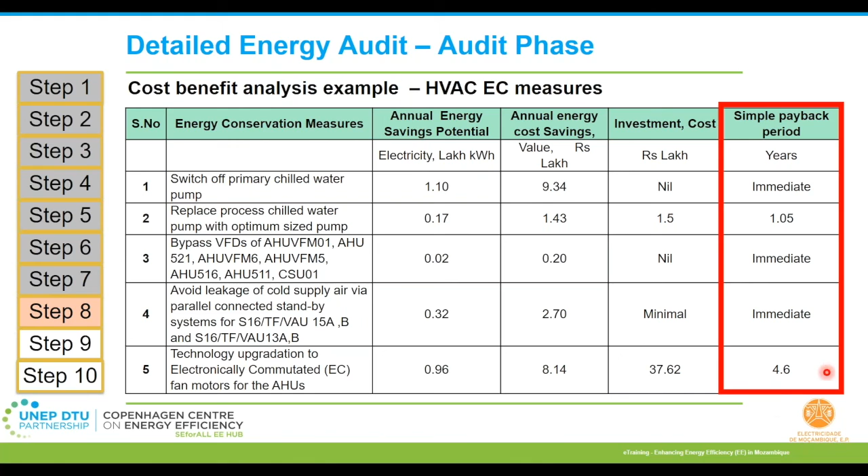And of course, the auditing team will be preparing a report containing all the details which I have discussed earlier: data recorded, the different calculations, technical and economic assessments, detailed proposals and recommendations. A formal closing presentation will be made to the top management, who will be the final decision makers. And then, as I mentioned earlier, a good and reliable energy auditor would further assist the building with implementation of the energy conservation measures they have recommended. It also depends on the agreement conditions between the energy auditing firm and the building management regarding post-audit phase engagements. However, it is highly recommended that the engagement still exists and they continue to interact throughout the implementation phase.